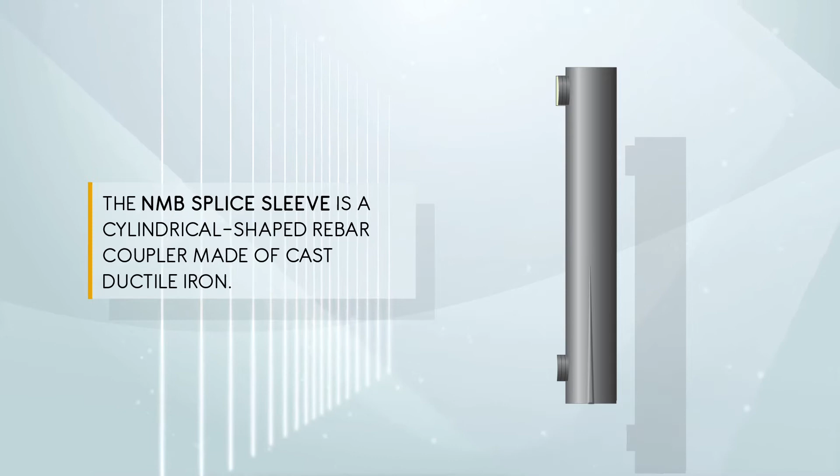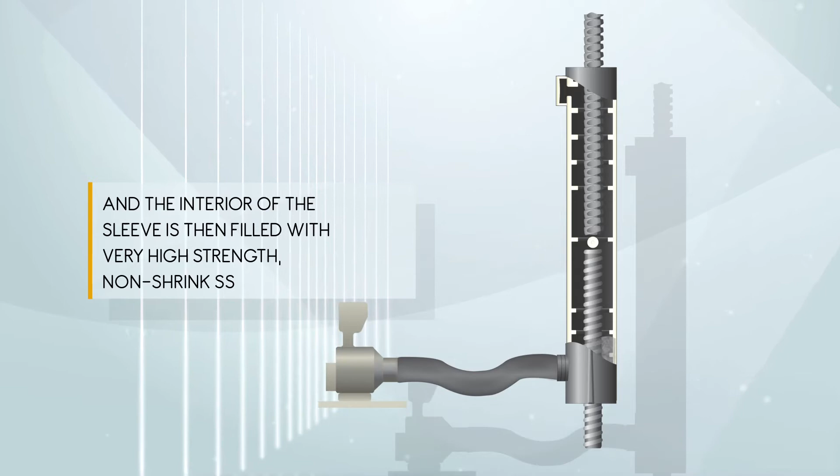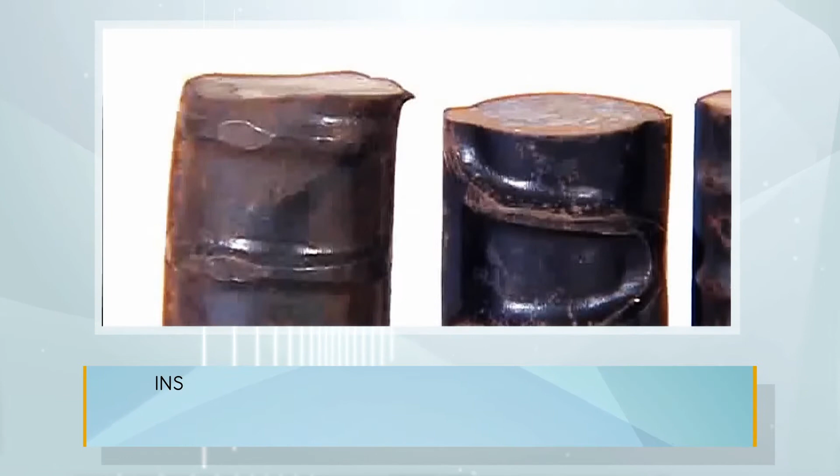The NMB Splice sleeve is a cylindrical-shaped rebar coupler made of cast ductile iron. The rebars to be spliced are inserted into the sleeve, and the interior of the sleeve is then filled with very high-strength, non-shrink SS mortar, a grout material especially designed for this particular purpose. Insert any type of deformed bars that comply with ASTM A615 and A706 inside the sleeve, including threaded rods if they comply with ASTM A615 and A706.

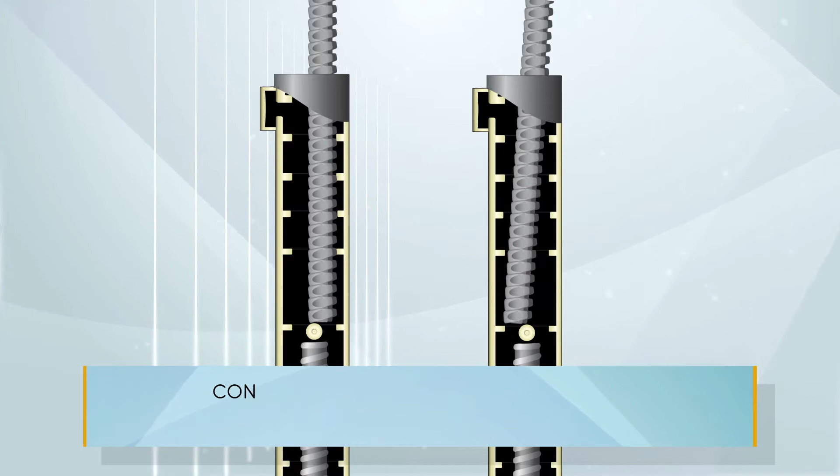Maintain enough embedment length and pump grout. Connections can be made with offset and misaligned bars. They don't need to be straight. An important thing is to maintain minimum embedment length. This contributes to effective plant and site operations.

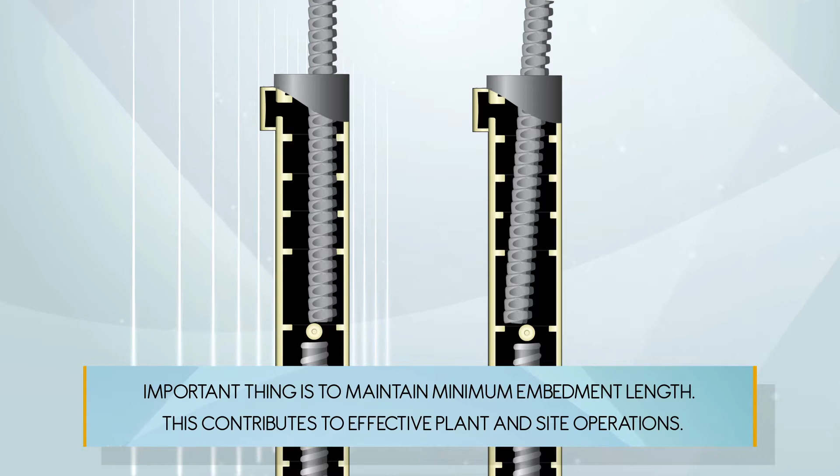NMB Splice sleeves have gone through many tests and have demonstrated their performance. In Japan, NMB has been approved for Class SA connection and is evaluated as Type 2 connection in the US. NMB Splice sleeve Super UX model has ICC ES ESR 3141. NMB is the only grouted mechanical splice evaluated as Type 2 under the current ICC ES ESR.

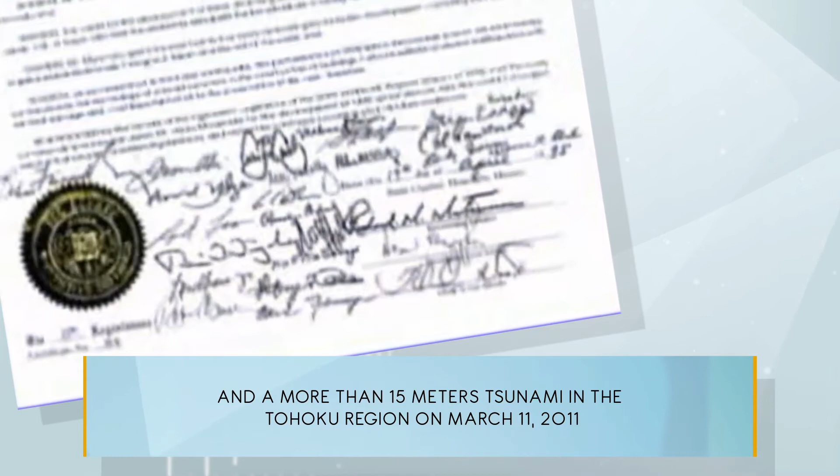NMB Splice sleeve was invented in Hawaii, and the state of Hawaii praised NMB and issued a recognition after the Kobe earthquake in 1995, as the buildings that used NMB remained undamaged and many lives were saved. More recently, the structures and buildings with NMB Splice sleeve systems experienced magnitude 9.0 shaking and a more than 15-meter tsunami in the Tohoku region on March 11th of 2011, as well as 2 above magnitude 7.0 earthquakes in Kumamoto in February of 2016. And all the structures and buildings with NMB have survived without any structural damage.

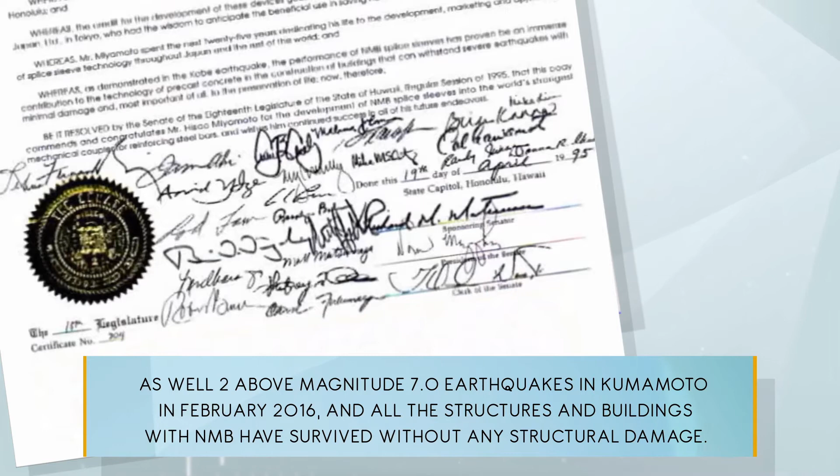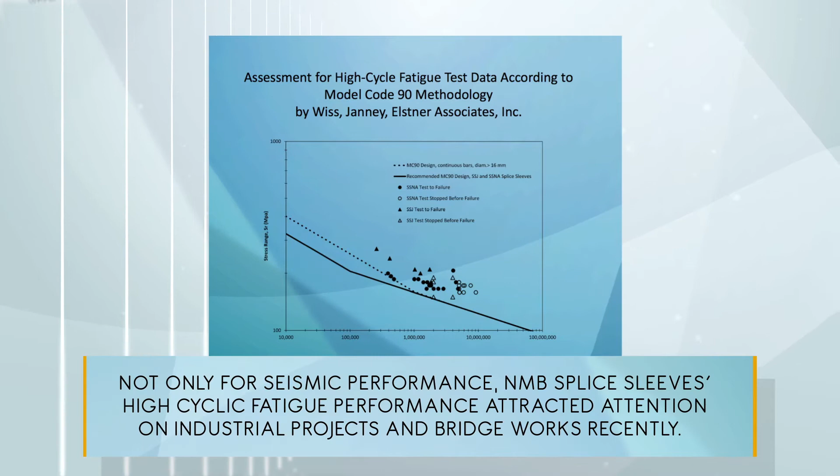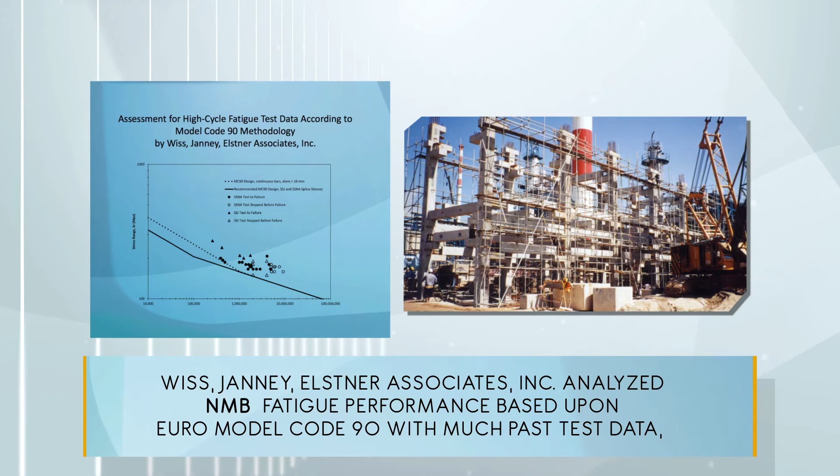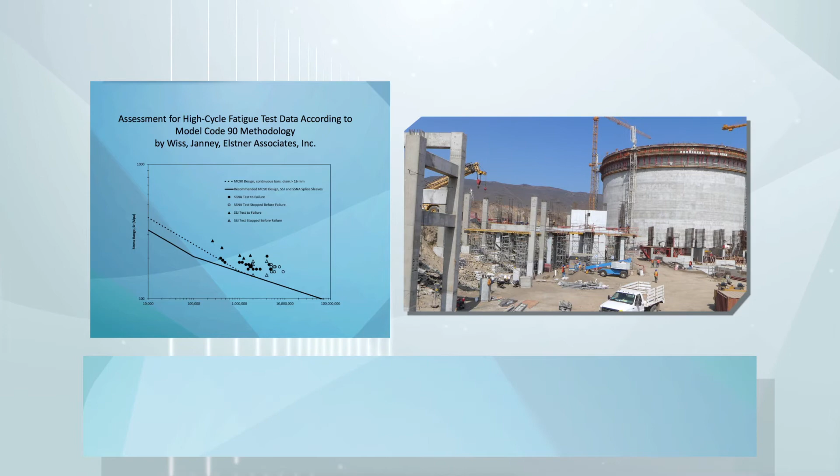Not only for seismic performance, NMB Splice sleeves' high cyclic fatigue performance attracted attention on industrial projects and bridgeworks recently. Wiss, Janney, Elstner Associates Inc. analyzed NMB fatigue performance based upon Euro Model Code 90 with much past test data, and concluded that NMB Splice sleeve performance for more than 100 million cyclic loads is equivalent to that for a piece of bar. NMB Splice sleeves are being used for many industrial pipe racks and other facilities because of its superiority compared to other connections.

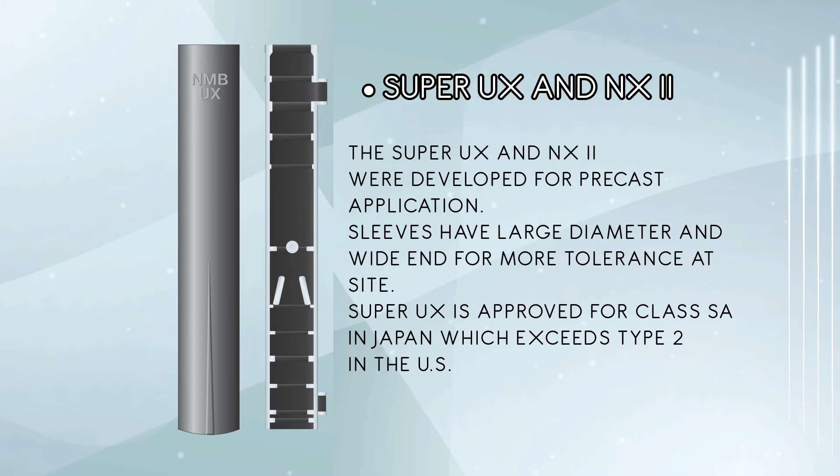The Super UX and NX II were developed for precast application. Sleeves have a larger diameter and wider end for more tolerance at site. Super UX is approved for Class SA in Japan, which exceeds Type 2 in the US. The NX II is categorized as Class A connection in Japan. Both the Super UX and the NX II are available in size 5 through size 16.

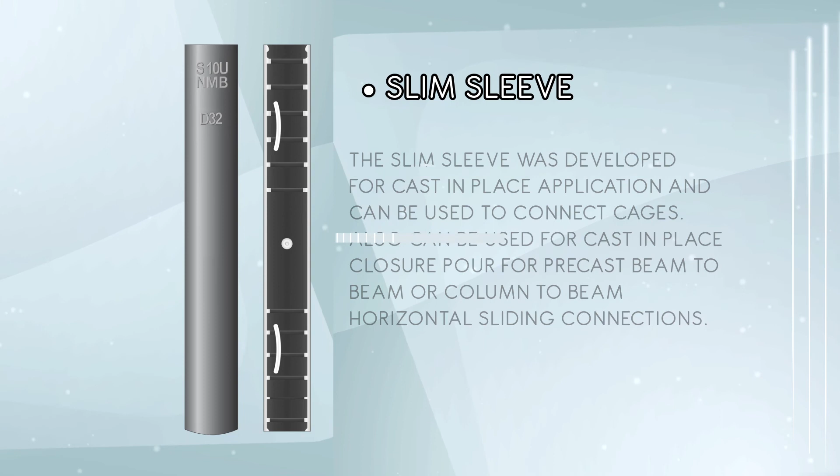The slim sleeve was developed for cast-in-place application and can be used to connect cages. It can also be used for cast-in-place closure pour for precast beam-to-beam or column-to-beam horizontal sliding connections. Our policy of quality control and continuous improvement guarantees that we can offer the most reliable system in the market.